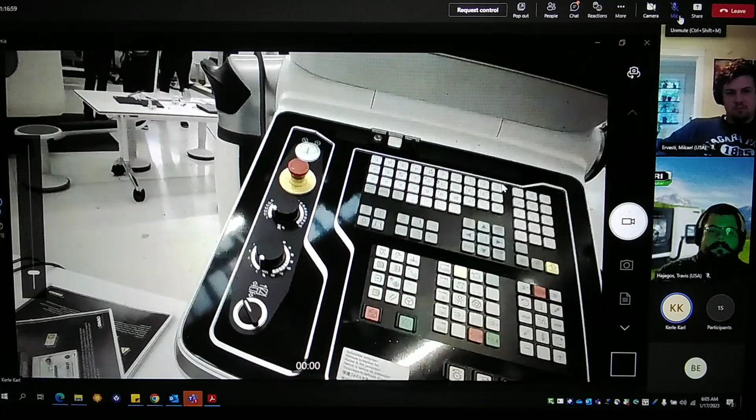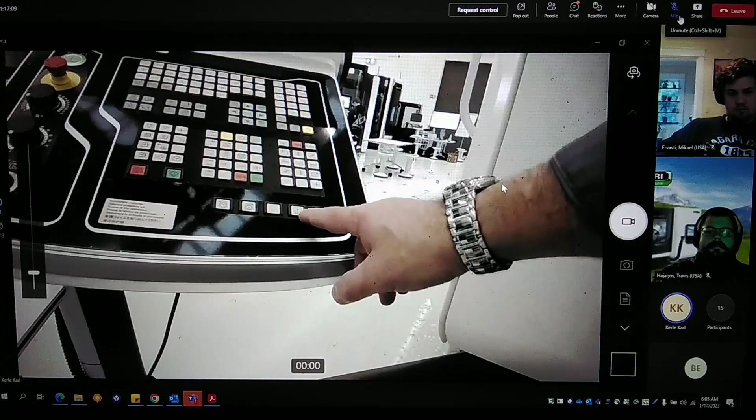I hope you can see that. Here on top is the monitor, and underneath is the keyboard. We have available all the functions, services, and diagnostics we'll need later on.

When we press the button for unlocking the working area door, and click once on the screen since it's a touch monitor, we get the normal monitor contents and it becomes unlocked. You see the symbol with the yellow frame around it - this is for the door locking mechanism. Now it's unlocked, therefore it's yellow indicated.

Now we can open the working area door, and have a look inside this machine. Can you see that so far, boys?

Good. Here you see this is the NC circular table, also assembled on the linear axis called Y. Here on top you see the milling head. The milling head moving left and right when you stay in front of the machine is the X-axis movement, and up and down of the RAM is the main direction, the Z-axis.

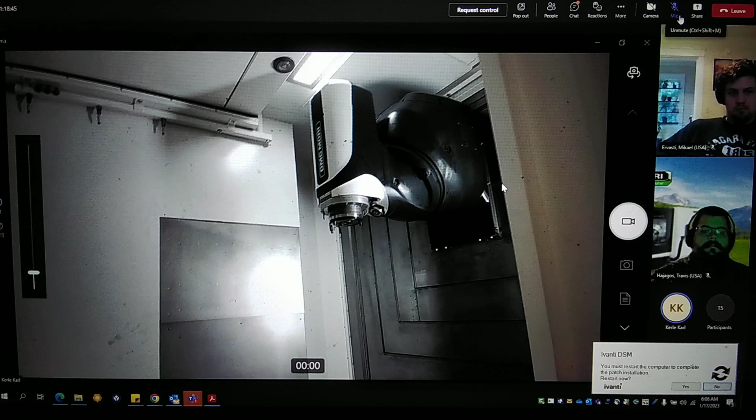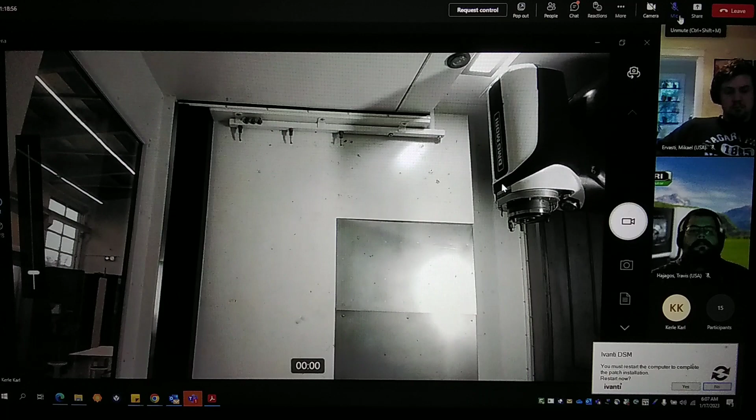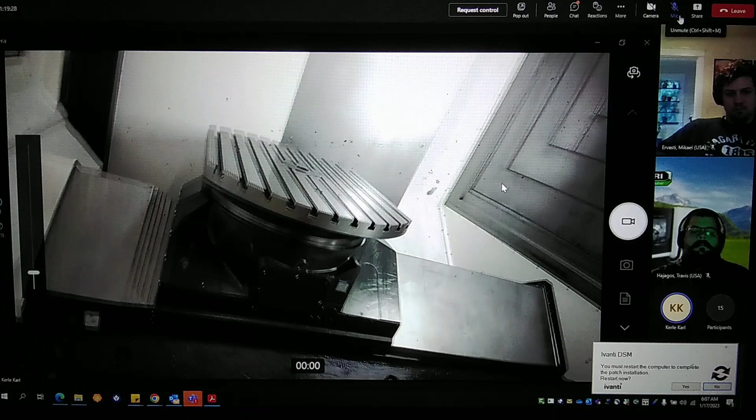The orientation of the milling head is vertical, as you can see here. On the left, a little bit, you see a 45 degree angle plane - this is the swivel plane. The milling head swivels around here, and that means we have a 5-axis milling machine: 3 linear axes, the swivel milling head called B-axis, and here underneath the table, the C-axis.

Is this so far so good as an overview? Good.

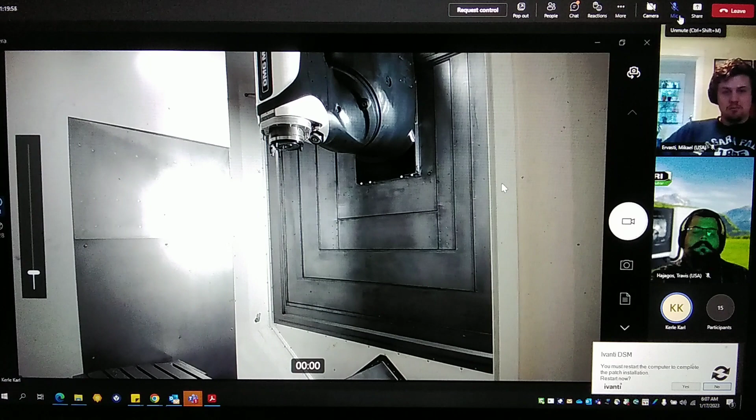Also, when you look at the RAM, the milling head, you see in the backside especially quadrangular metal sheets. This is a sliding plate, and this metal plate can move in X and Z axis, up and down, left and right at the same time. This was specially developed by the engineers of Deckel Maho Pfronten.

On the left side here, you see the bright point - this is the tool loading door. We will see it later on, and I can show you how to open it. It's also manually possible when we operate it manually controlled within the help functions.

Can we say so far so good? Hello guys, is this so far so good? Yes, so far so good. Yep, all good. Do you have questions so far? Should I repeat something or can we continue? No questions so far.

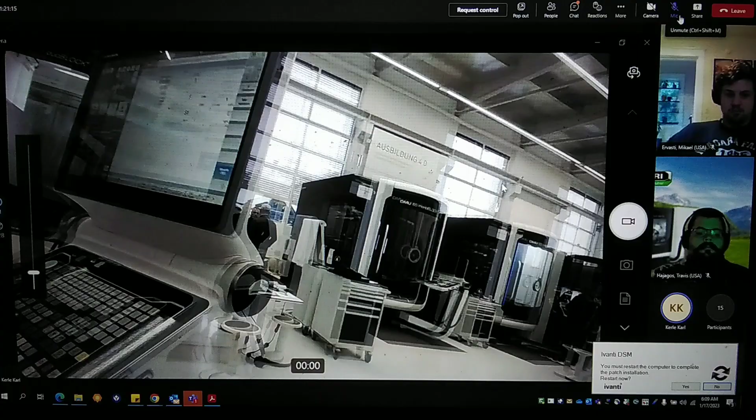Okay, let's say this is again a standard DMU 80 P. Also on the front side we have an additional door, and when we open this door, you can see now from the front. It's a little bit difficult to show you, but we have two sides completely open of the working area.

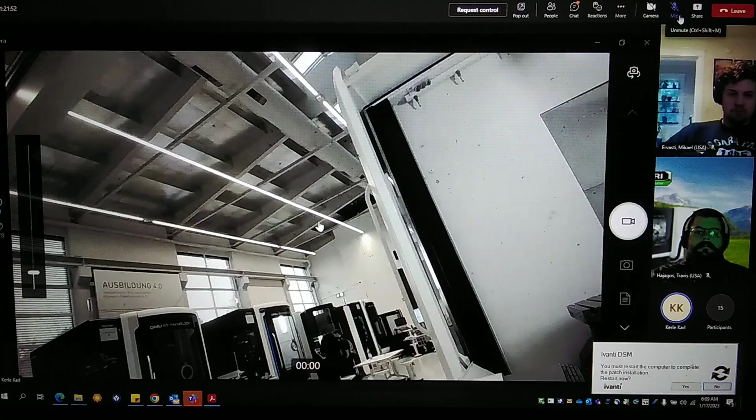The range of the machine is completely open. And when I walk with you now in the following, you can see that much better, I hope. One moment, give me a second.

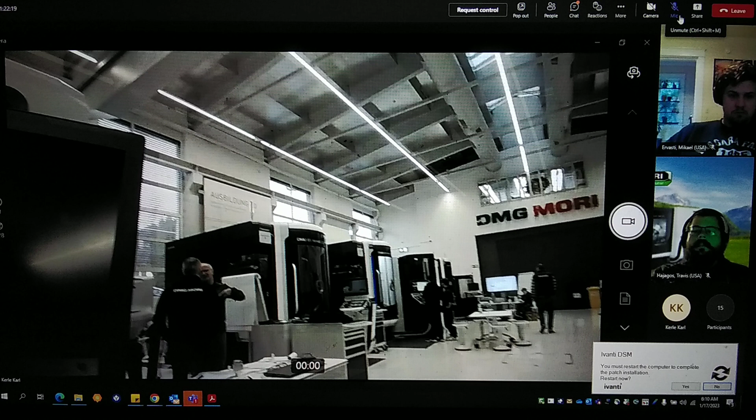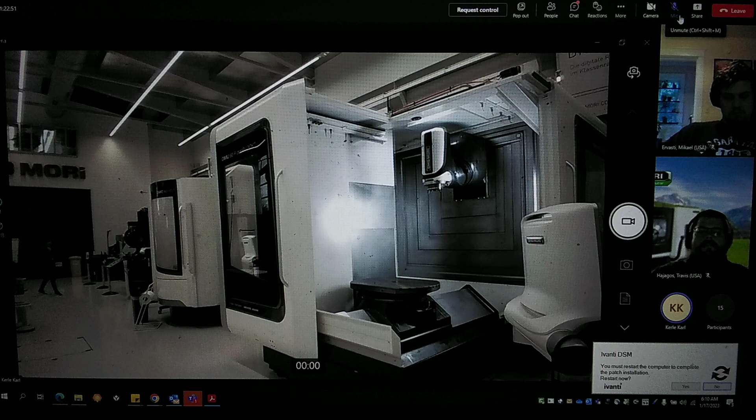So now we stay in front of the machine, and you can see the open space when we open the door completely. Also the other one we can open totally. So now you see the full machine is accessible by a crane or another lift. You can put in a heavy workpiece very easily with this kind of machine.

It's two doors on the left and right side of the machine when you stay in front. So that means this is a big advantage of this construction principle. Is this so far so good, boys, for the moment? Yes. Okay, thank you.

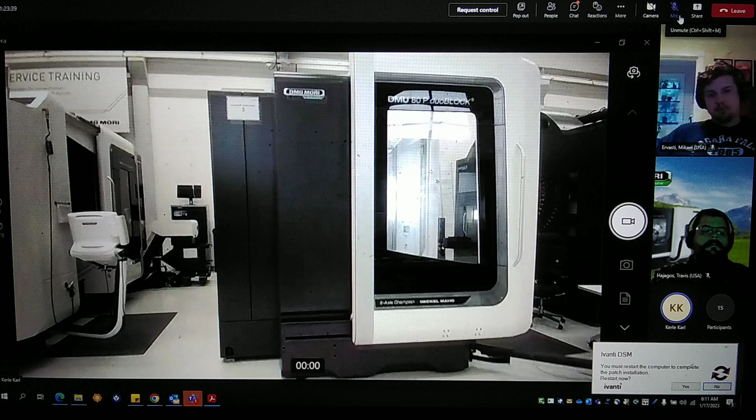Very nice. So then we will close the first one on the front side, moving parallel to the X-axis. If necessary, we can also start the machine, close and lock it afterwards. Now the machine looks like this - I'm now a few meters away so you can check the full height. It's about 2.5, 2 meters 70.

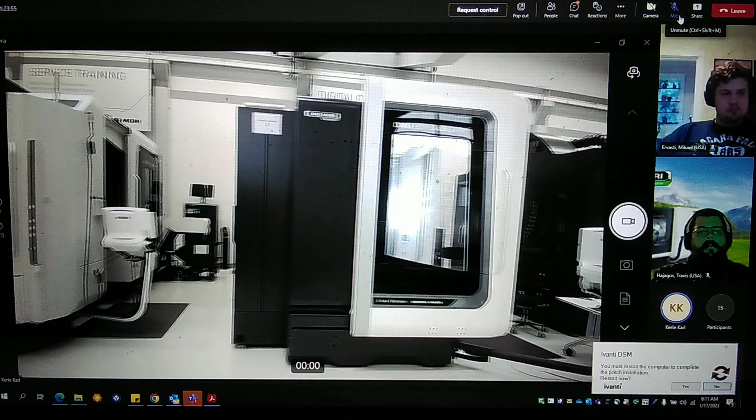The height of the machine, of the cabin. Okay, now we walk along the left side, through the left side here of the machine. And so now here at the beginning, in the left corner in front of the machine, you see here a door.

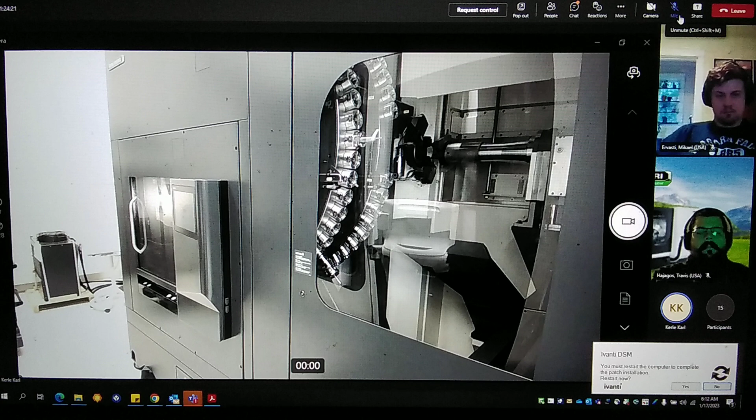And behind the door, by a glass window, you see the magazine discs. Can you see that? Two magazine discs.

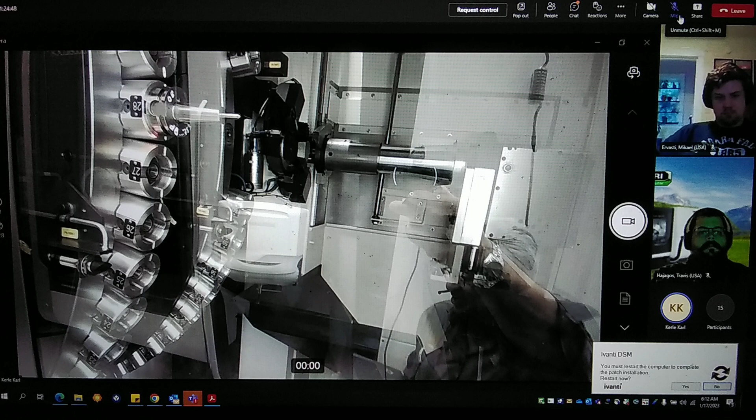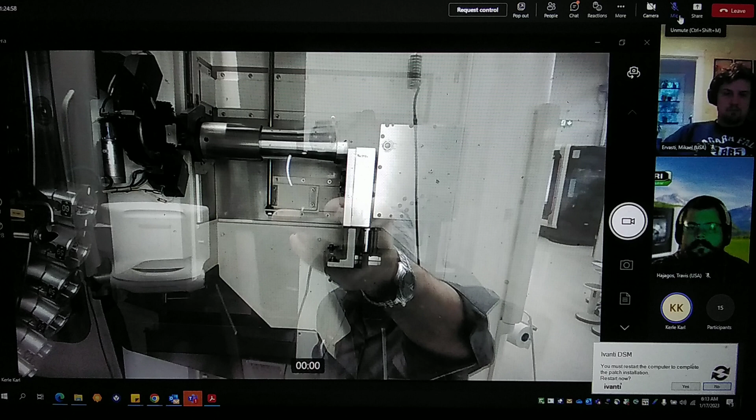Okay, and now I go a little bit closer, but yeah, we have here a lot of reflections. Maybe now it's better. You can see behind, on the rear side, in the deep, you see there a tool changer. It's a black unit on the left, like a silver shiny cylindric part. And on the right end we have here like an aluminium, a shiny polished metal box. Yeah, that's the drive. And this is our full automatic tool changer system. Okay, can you see that so far?

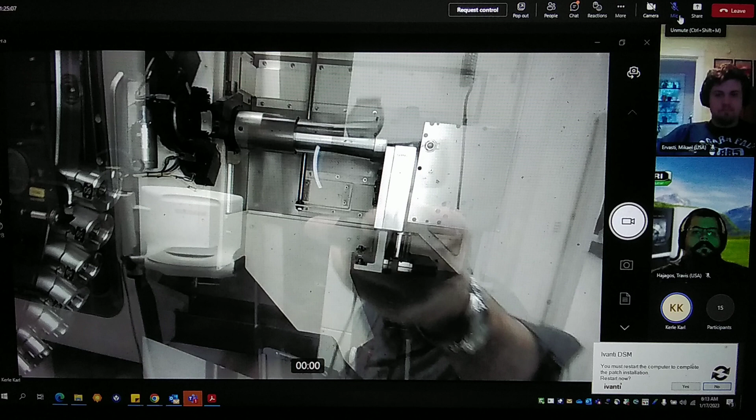With a specially gripper, we call it double tool gripper. Okay, can you see it a little bit? I hope. Maybe later on it's a little bit better, yeah, when we open the door.

Also now here on the left, you can check, this is the tool fixture, HSK tool fixtures unit. HSK 63 is the dimension. Can you see that so far, boys? Yes.

Good. Now, when we look short in here, it's not really good. Now we will do it. The details we will do a little bit later.

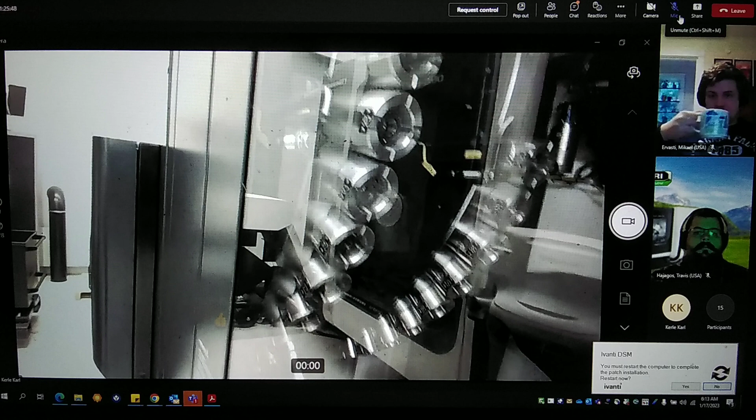Also here now, in following, we are still on the left side of the machine. Now you see here by the dark background, it's like a mirror effect. You see me too, as a shadow, within the magazine, but I promise you I stay outside. I'm not in the dangerous area.

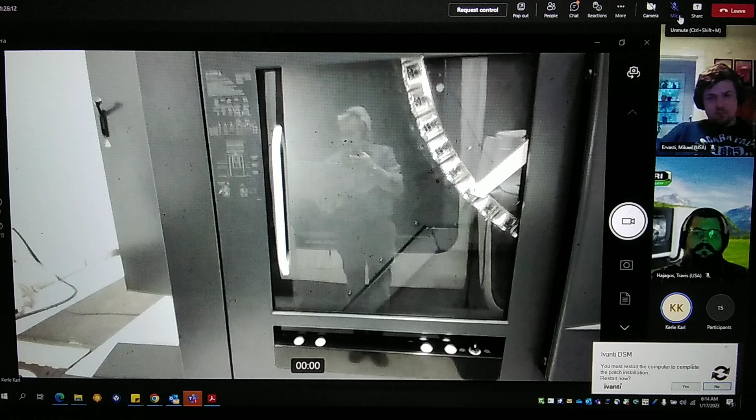And also here we see now a big window, and this window is the loading or unloading station for the tools, to put it into the first disc. And when you look now in that view, you see here only one disc. The second disc is separated, protected, so that means now here it's safe to load and unload tools, okay?

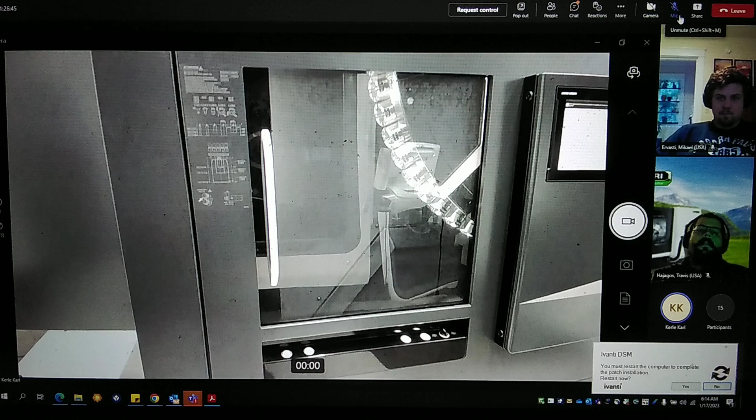When we open the window, now you see I open the window, and here short behind the first disc you see the metal cover here. This is the separation between the second disc, or when you have more, so that's necessary to protect the operator if the tool exchange happens on the first disc, or the tools will be loaded new in the first disc. So the operator must be protected, and also you can work continuing with the machine.

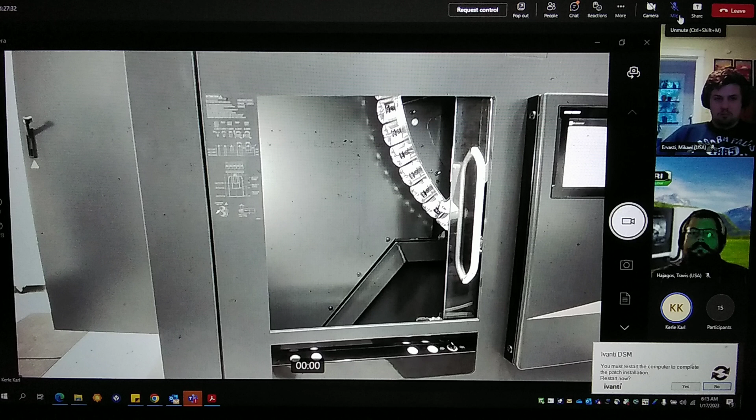Why? The tools for the machining, for the normal machine run, are located normally in the second disc, or in the disc next to the machine located. Okay, so we save the time for tool change sequences. Can we say so far so good for you boys for the moment? Yes.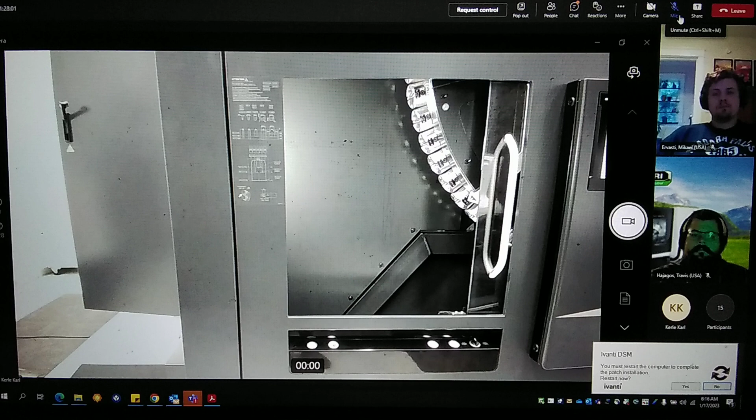So also here, underneath that window, I'm sorry, it's not really able to see, it's really dark here. The buttons are illuminated.

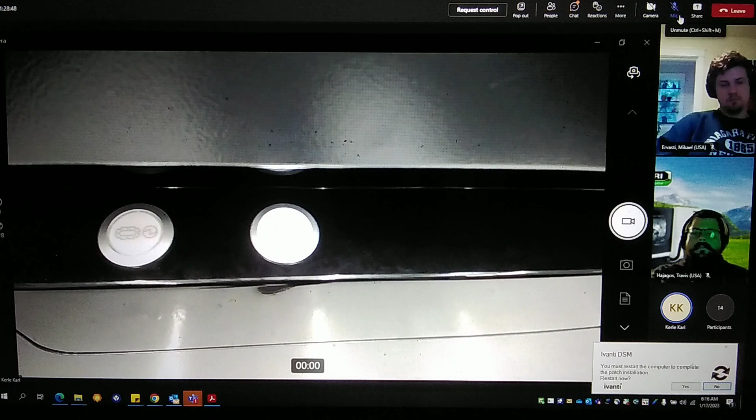Let's say we have here a small control panel only for opening. This is happening here on the left, the button here. Can you see the symbol here on the left? This is for unlocking the tool loading door. Here in the second position, we have illumination on, to see, to know the door now is really unlocked. It's safe, it's prepared for opening.

And here the other two buttons is the light button, for confirmation - I load a tool or I unload a tool, okay? And the button here on the right hand, depending, turn either button to the left or to the right, so I can force disc movement of the first disc, clockwise or counterclockwise. Can you see that so far? Yep.

Okay, that's, let's say, the simple control panel here for the loading, unloading station of the tool magazine. Now I will close the door, and you see short after, now here the light is off, and also here you see now on the left end the second indication of the lamp. It shows us the same symbol as we saw before by the working area door locking, unlocking mechanism. Can you see that? So far so good?

Hello guys, so far, so good? Yes. Yes. Yep. It's good. Thank you for the response.

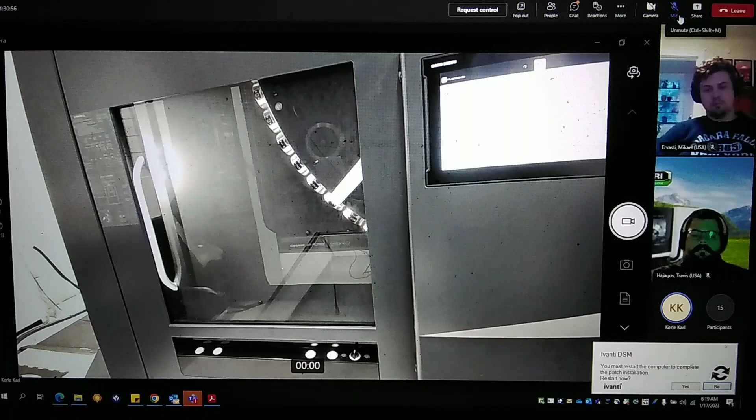Now, also next to the loading station, we have here also a specially assembled control unit. This is for the tool management, for the tool data management. And here we have to enter the length, the radius, the diameter, the type of tool, whatever else, and also to which magazine list or whatever else. It's necessary here to fix all the tool data. This is possible to do directly here by the loading window, on the right side here of the loading window of the tool magazine. Can you see that?

Boys, is this so far so good? Yes, we can see that. Okay, very nice. So let's say this all happened on the left side of the machine.

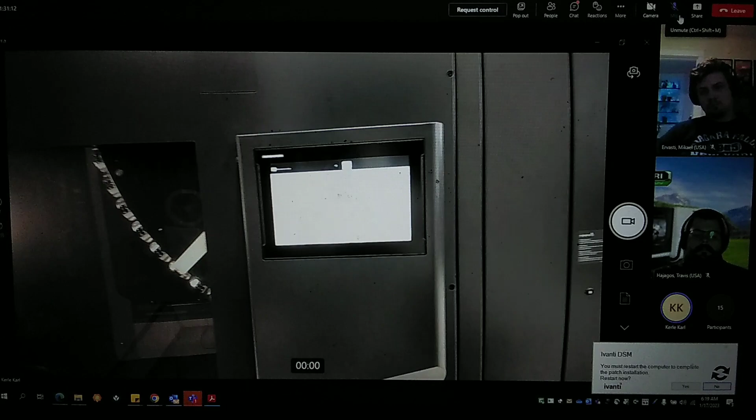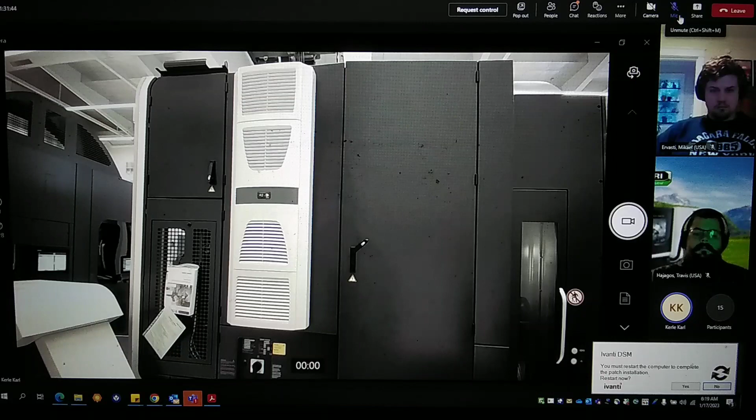Now we walk to the rear side, and here I open for you the control cabinet. First, let's say, so it looks like the machine when the door is closed - you see here the white unit on the control cabinet door. That's the cooling system, to cool down and keep constant the temperature inside the control cabinet. That's very important for the processing units, the drives and so on, to keep the temperature in a specially defined range.

When we look a bit more down, you see here the floor on the left, and also the specially designed coolant tank and the chip conveyor with the white arm, and on top the special hole you can put a carrier underneath for collecting the chips. We also have two steps to get up to the control cabinet, with a specially slip-protected cover. On the left, underneath the cooling unit, you see the main board with the main switch and the special machine data written on it.

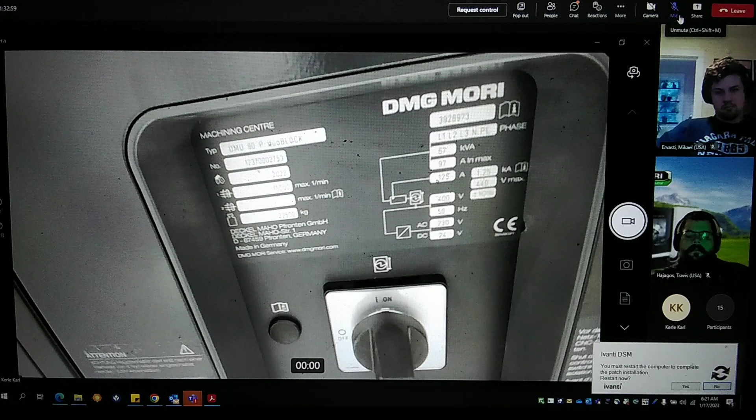Can you see that so far, boys? Yes, we can see it. Okay, very nice, thank you.

So now when we open the control cabinet, it looks like that. I'm sorry, it will be a little more noisy now. I hope it's okay for the moment. I'll give you first the complete view of the control cabinet. Here on the left, the white unit - you see again, that's the refrigerator, the cooling system.

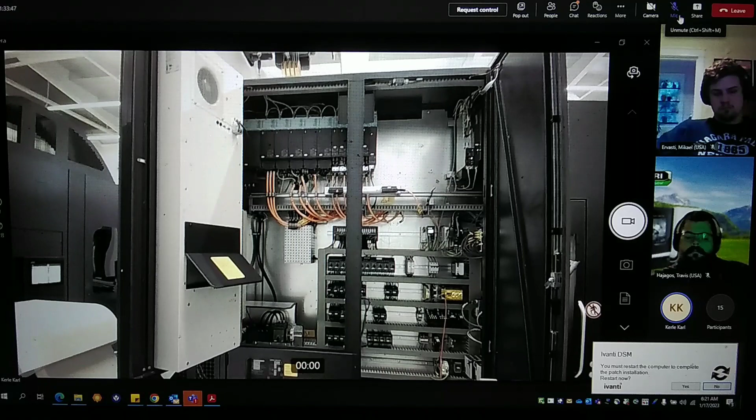In the left upper corner, the dark gray boxes with the light blue cap on top - this is the drive system, Sinamics S120. The orange colored cables are the energy cables, the motor cables that guide the current, the power to the motor.

In the middle range of the control cabinet, you see contactors, fuses, and specially designed safety boxes. For example, the yellow-green box - maybe you know that, it's called PNOZ multi. It's for monitoring all the working area doors, the maintenance and service doors, to really know well that everything is okay with the position and so on.

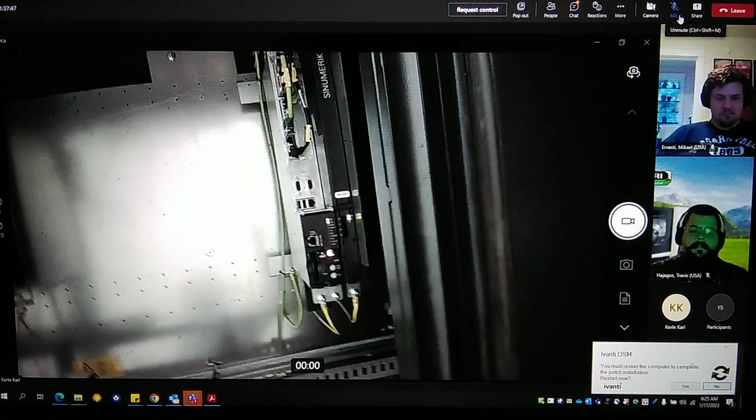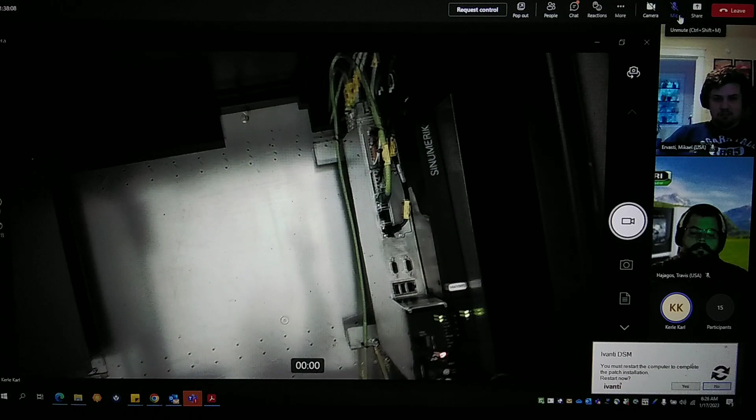Now when you look here to the camera, in the right upper area of the control cabinet, you see the bigger unit on the left is the NCU - that's the main control unit, like the master brain. On the right side you see the so-called extension card, and we need the extension card to control all the drive units here, for every motor, okay?

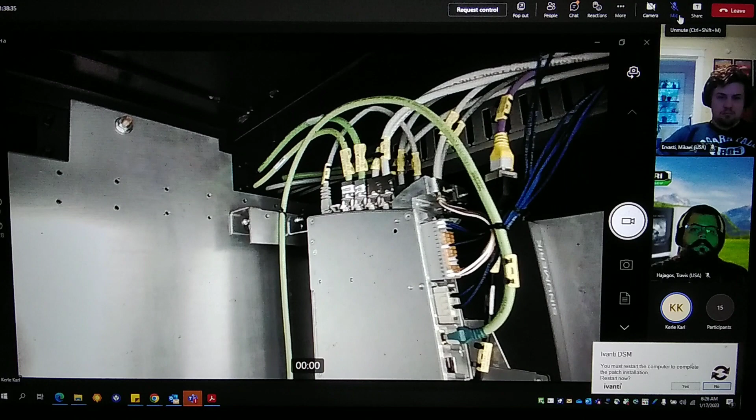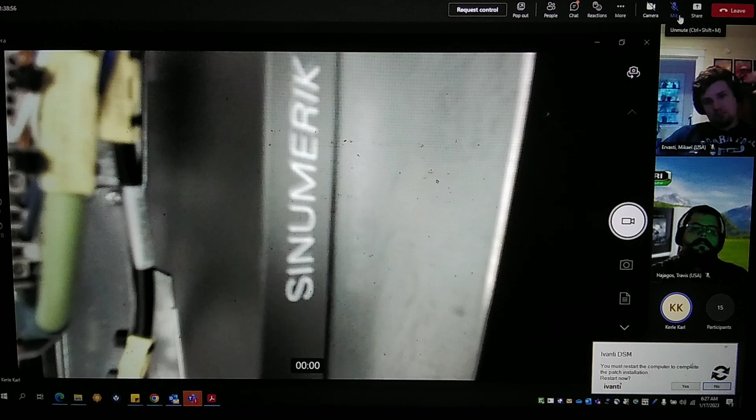The reason an extension card is necessary for this control purpose: when you look at the top face of the NCU, you see the full amount of sockets occupied with cables. Counting them, 5 and 1 is 6. But we have much more axes to control, and therefore it's necessary to have the second one, the small extension card on the right, available to expand the number of DRIVE-CLiQ sockets.

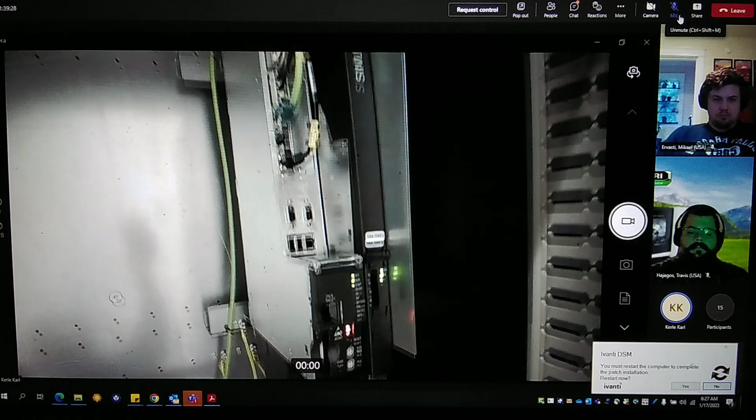The DRIVE-CLiQ bus wire is the connection here on the top face of the SINAMICS drive unit, and all of them must be controlled by the NCU and/or here by the extension card with the designation NX. So far so good? Yeah, so far so good.

Okay, very nice. Now here in the center, when you look once more from the outside to the control cabinet, you see in the middle a column, and on the rear side of this column we have also an additional control unit assembled. When you read the designation, you see Simatic PC.

This is the so-called IPC 427E. E means this is the third hardware version we used from the beginning of Silos. And on this unit is running the operating system Windows 10.

So far so good, boys? Yes, sir.

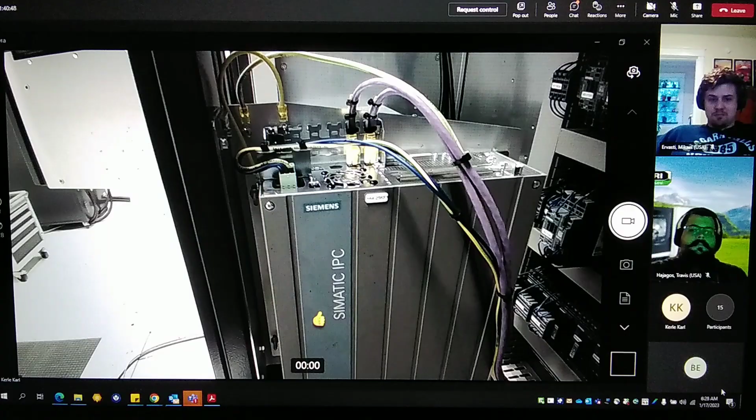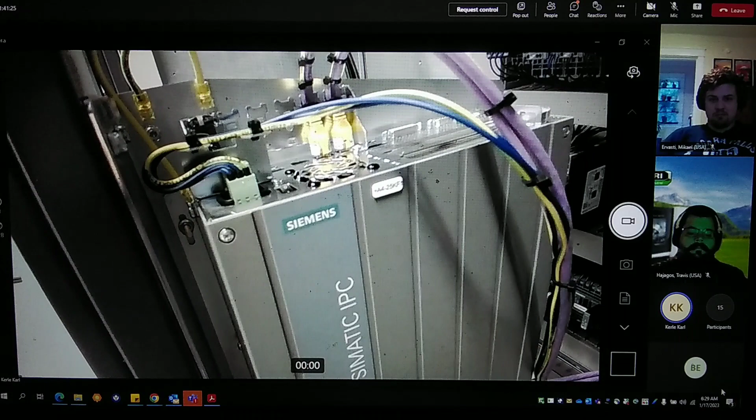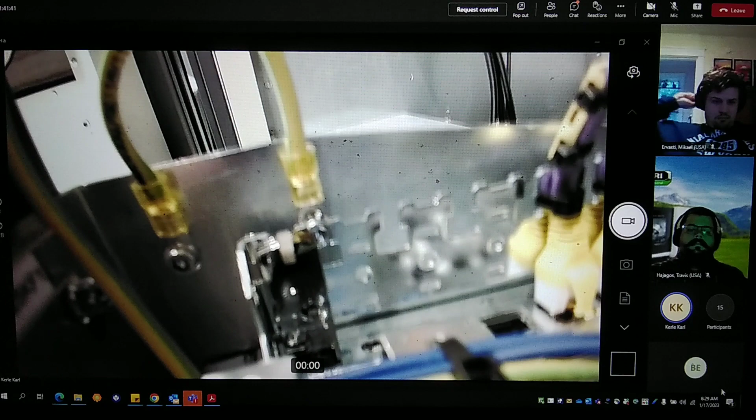It's a huge one, big enough to keep all the data from the customer. Here on the front edge you can see the control supply connection, and a little bit behind on the left you see it's especially a USB inserted - that's the so-called dongle or WIBU key. This is necessary to release all the functions of the Silos software.

Okay, so far so good. Hello guys, do you have questions? Can I explain something additional, or is this so far so good for you for the moment? Good for now, all good. Okay, thank you for the response.

Now also when you look at that unit, remember later why we need it. Here we have two main software packages running. The first is the HMI Operate software. This kind of software is responsible for indicating and showing us on the control panel the SINUMERIK screen - everything belonging to the NC software like that.

And the second main package running here on the IPC is called Silos. Actually we have the Silos version 6 installed. Later on I will show you the app selector as well as the several functions of apps, whatever you like to see there. This IPC unit is responsible for running these software packages.

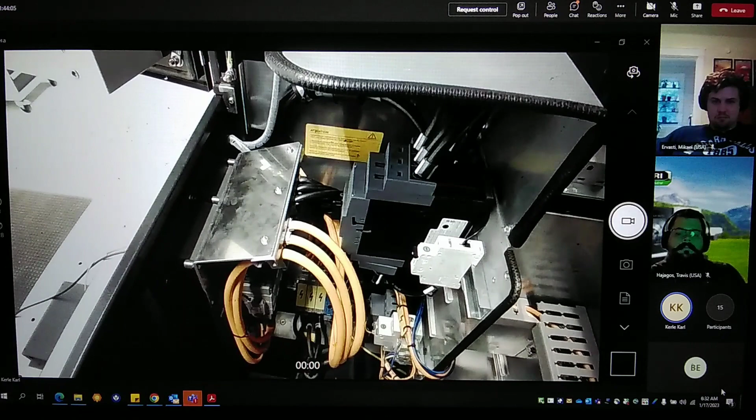In the left half with the small door, the door is closed at the moment. You see there also the power cable, especially the power protective switch, the dark gray box in the background with the big black cables. And also underneath you can see the main terminal, to connect the machine by the especially big terminals to the power supply.

Can you see that so far, boys? Yep.

I think, or what do you think? Is this good enough as an overview of the units and components within the control cabinet? What do you think? Tell me short, please. I think it's good, I think you nailed everything.

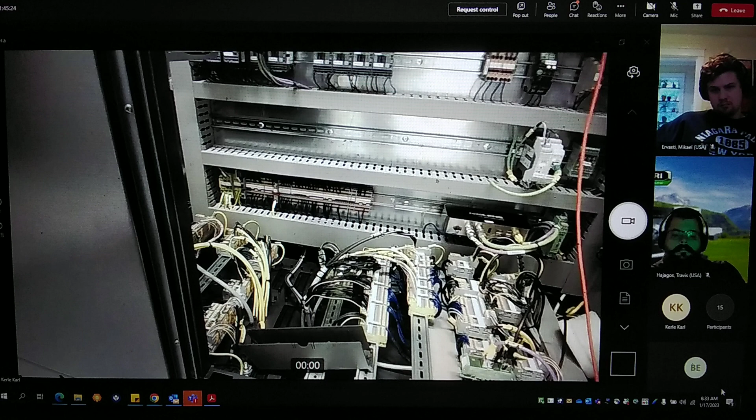Yeah, or do you have questions? Not at the moment, okay? What do you think, the other guys? I'm fine with this. Sorry, please once more. I am fine with this, I am good with this. Okay good, thank you. And the other participants, do you agree, or what do you think? Okay, good.

So then, let's finish the walk around the machine. I have to close the door here, otherwise the temperature inside will be too high. Good.

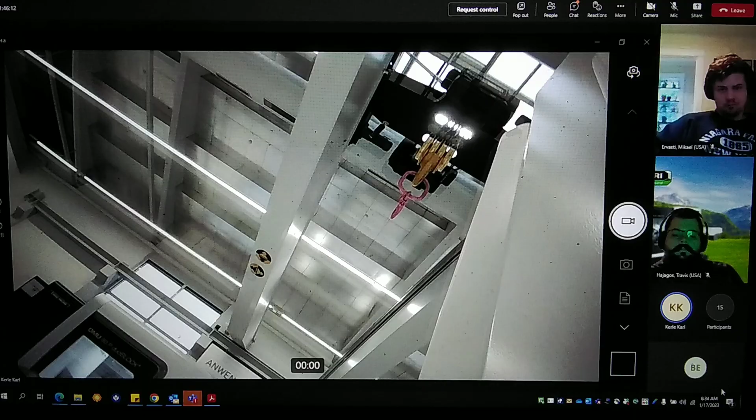Now I stay here on the right side of the machine. You can hear it, I have to close now the working area door, mainly. Why? So now here, you can see...

Also a special window - this is the medium cabinet. Here on the left, you see the pneumatic maintenance units to drain off the water from the air, to control the pressure, and the filters to keep the compressed air clean. Underneath you see the special lubrication tank for the system and for special bearings. Also here the pressure indication and control mechanism of the pneumatic system.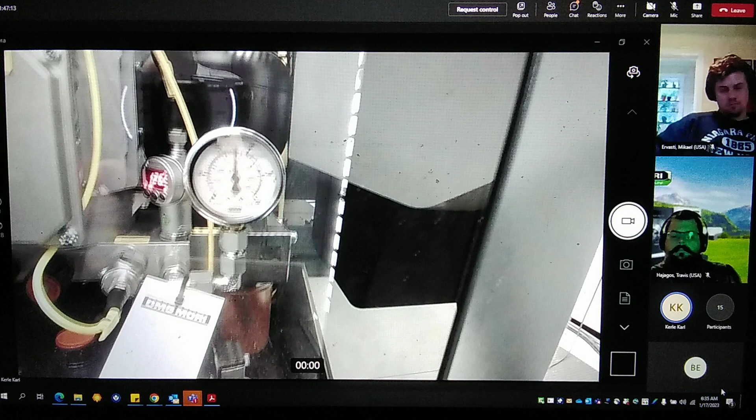And here in the right half, this is the separation for the hydraulic system. Also you see here the pressure indication - we have about 130 bar, that's the maximum pressure, and 110 bar is the minimum. This is the play, the hysteresis within which the pressure will be continuously controlled.

Here on the rear side you see a few big valves. Also underneath you see pressure switches, temperature switches, and other sensors. And here on the top, we can't have a direct look behind this cover, but we have special AS-i bus modules assembled to send this information to the control unit. AS-i bus is also for handling and controlling the input-output signals.

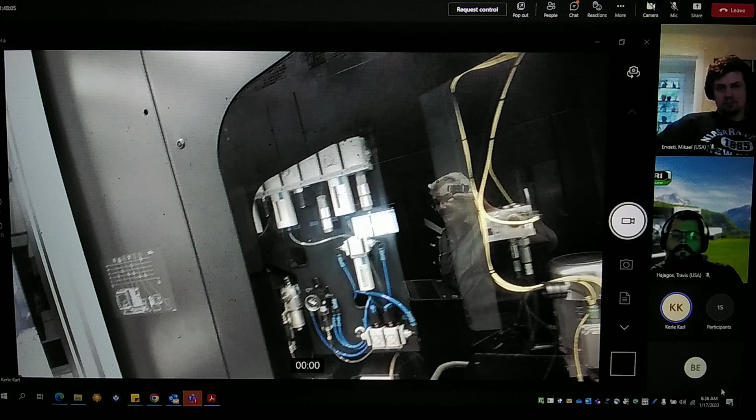Can we say so far so good?

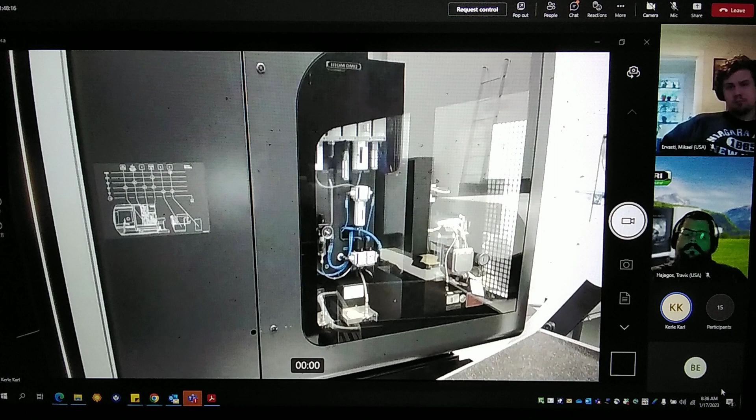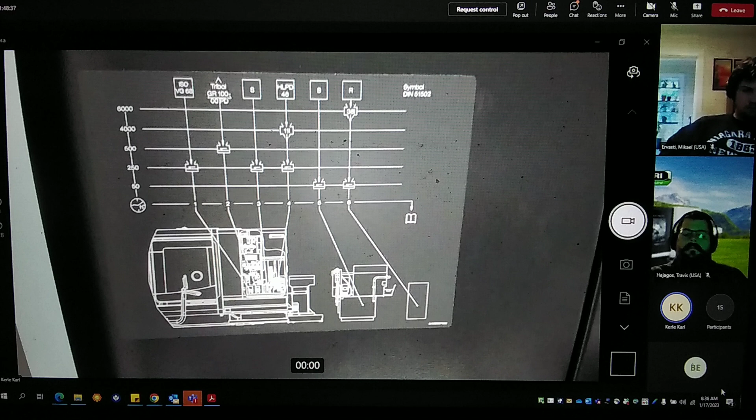And also, let's say here, when you look again to the compressed air, to the medium cabinet, on the left side, I zoom in a little bit. You have here an overview with signs and like a time schedule or an hour schedule, showing in which time and on which position you have to do maintenance. So directly on the machine, this drawing shows you the correct place, the time value, and the kind of lubricant you have to use to fill it up.

And the detailed description of these sequences you will always find in the machine operating manual. So far so good, boys, on that step?

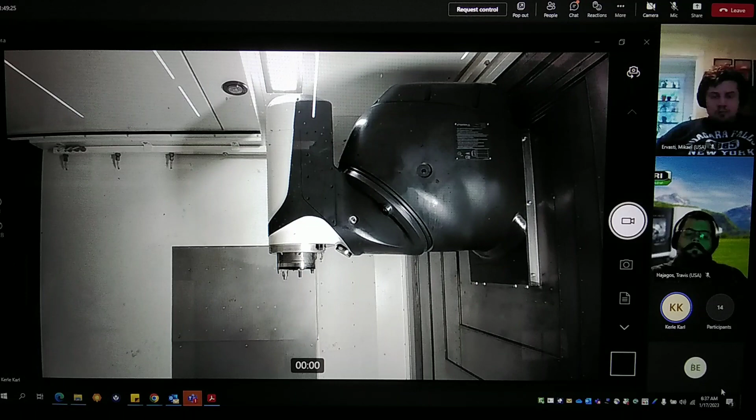Yes sir. So here now you see once more the RAM, I mean the swivel milling head. Also now from this view, by closed doors, you can see better the 45 degree swivel plan of the milling head. That means when we swivel down around 180 degrees, we can also mill horizontal.

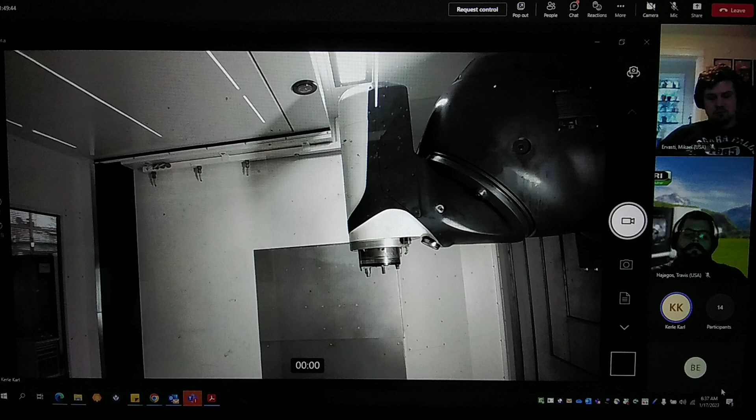So therefore we have here two main operating modes, like G17 and G18. G18 means vertical plan and G17 means horizontal plan. So that's what the customer likes about the machine very much - within one machine, he can work in two different plans just by turning the spindle.

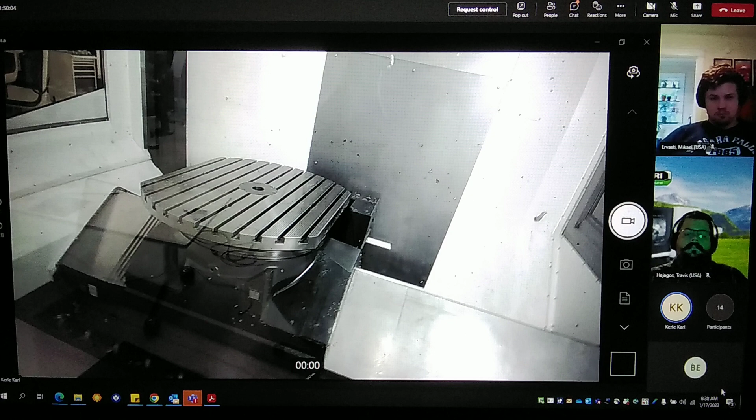And therefore also we have here a circular milling table on, so that means we have 5-axis simultaneous milling possible. The customer can cut 5 sides in parallel in one position of the workpiece.

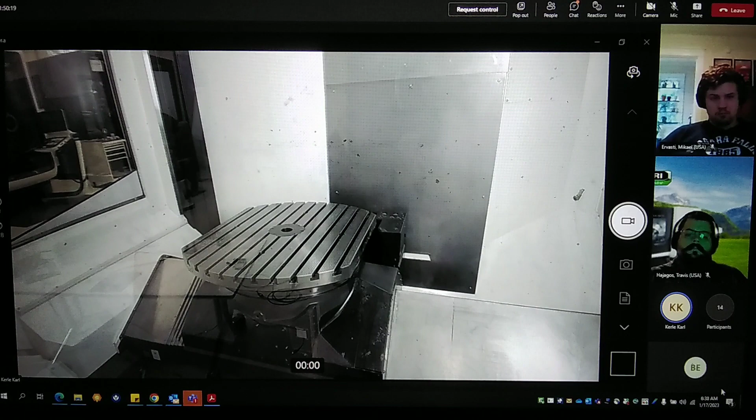Can we say so far so good?

Here you see now in the middle the polished, blank metal part. It's a cover, it looks like the roof of a house, yeah, with a high slope. So that means with the coolant, with the chip rinsing and so on, we can clean up the metal cover very well, so no chip can stick there, or not much.

And underneath here in a special groove, we have like a spiral, a special system to move out the chips from the working area. This brings the chips, you see with the white arm here, to the chip conveyor. Here underneath, you can see that a little bit.

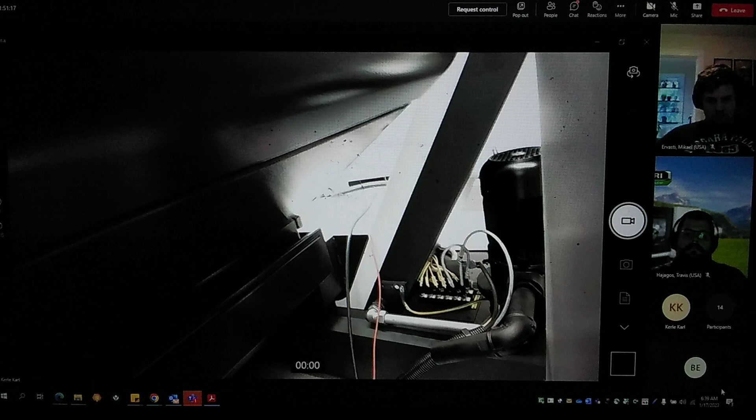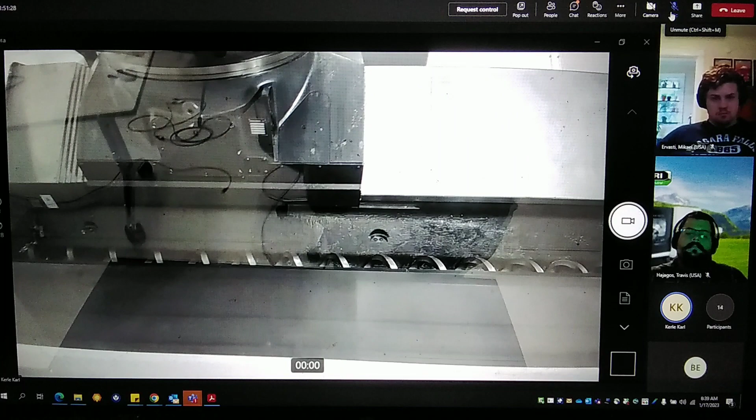And that's the way - on the left and right side, we have this spiral installed. So that means these units are responsible to take out and move out the chips. So far so good, boys, on that step? Yeah, sounds good.

Okay, very well. So now I am back here on my desk next to the machine. And here now, I can connect my laptop again to the machine network.

And shortly after, I can show you by sharing with a special tool, the screen content of the control unit in a perfect mode, without reflections, without a mirror effect, and without a shaking camera - since keeping a laptop and a camera steady in parallel is sometimes difficult.

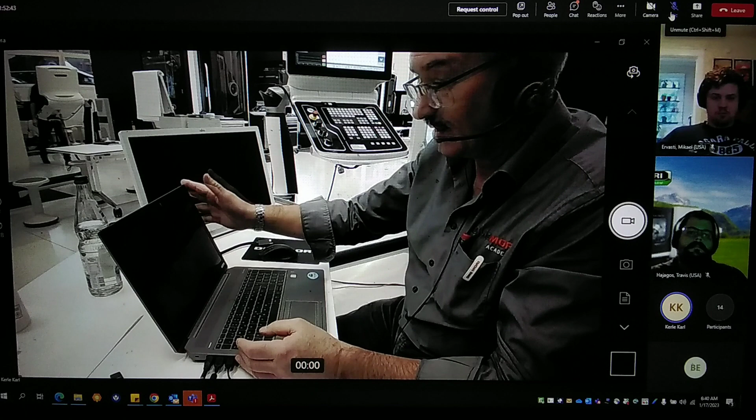Okay, now I have to reconnect all the components. I hope it will work.

I do, you have it? And also you got the last update? The last update happened, let's say approximately in October, maybe November last year. Did you receive that? Not that I know of. Yeah, I will show you later on the exact version, but let's say...